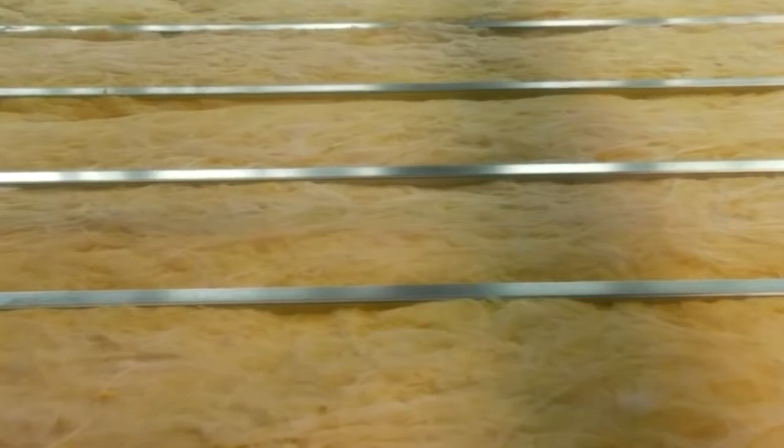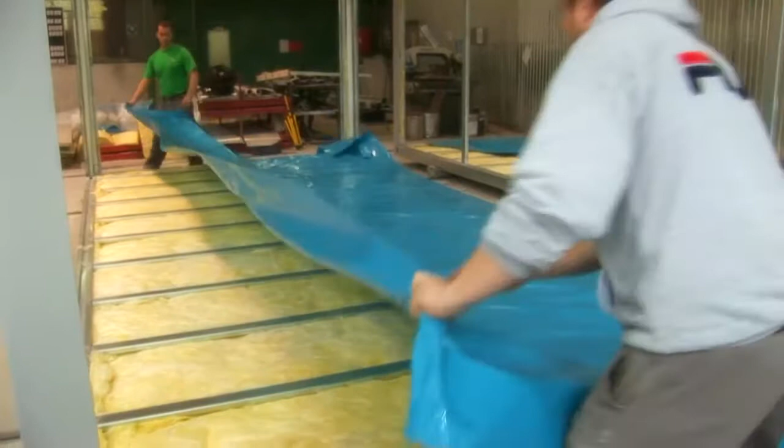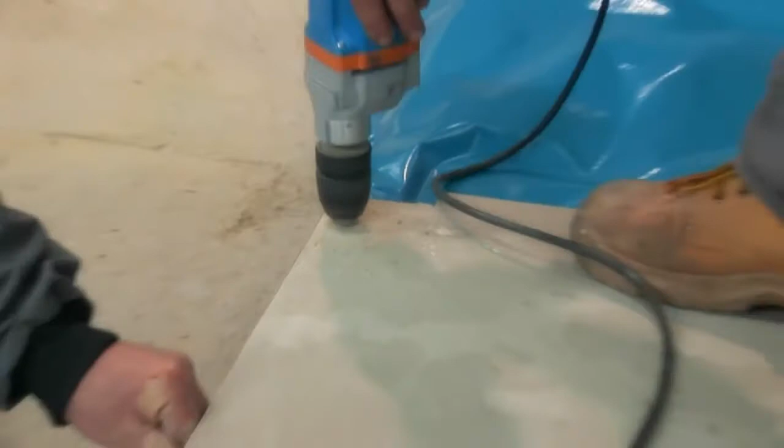CETRIS cement-bonded particle board is used in the system of prefabricated constructions in the form of distributing walkable layers on supports. The supports can be single or bidirectional in the version of wooden beams, pillows, steel beams, and the like. According to demand, the thermal and acoustic insulation is inserted between the beams based on specific requirements and is covered with a vapor barrier.

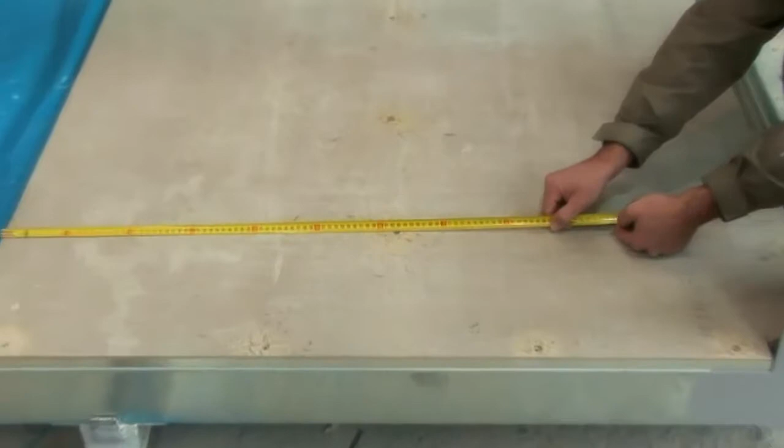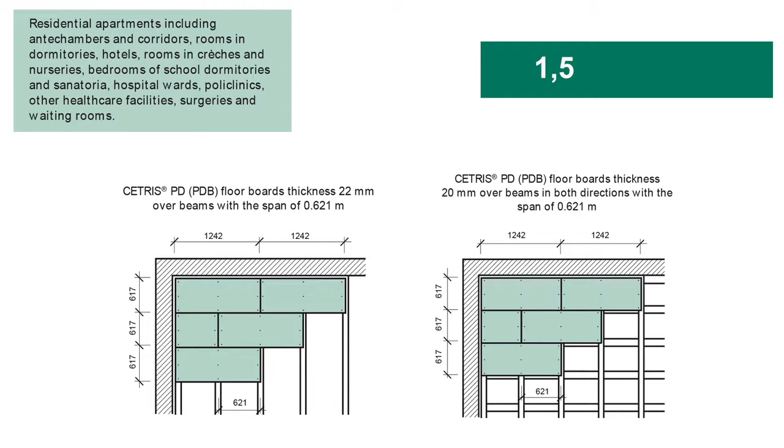CETRIS cement-bonded particle boards are laid close together. When using floor panels with tongue and groove, the joint is filled with dispersed glue in order to keep the interaction of the boards. The thickness of the CETRIS board depends on the support distance and size of the payload. In the technical details, dimensioning tables are elaborated, including the proposal of individual floor compositions for particular types of rooms.

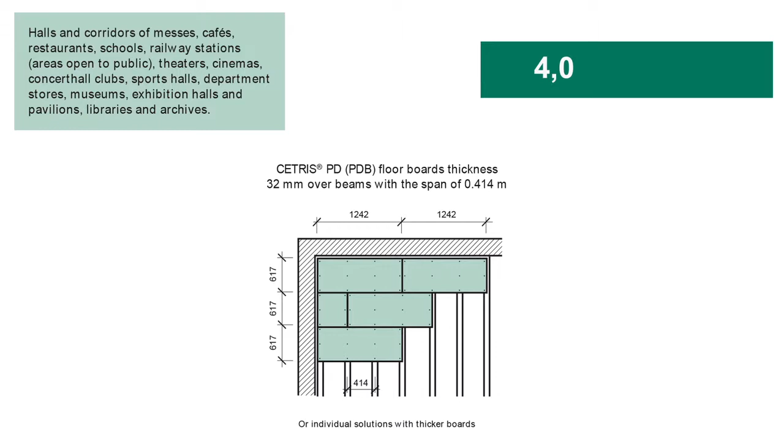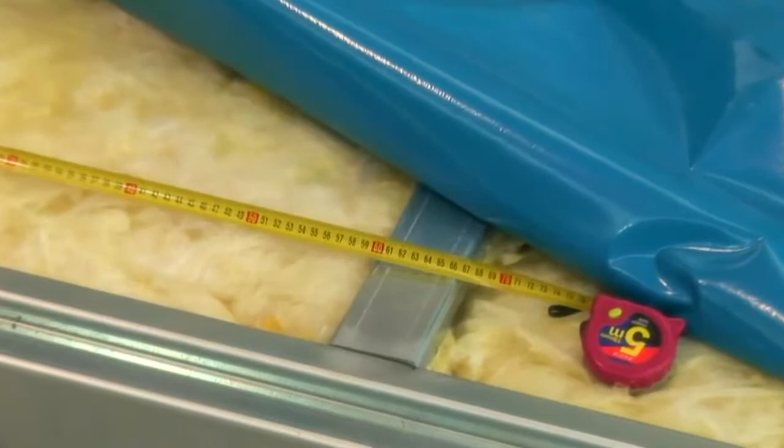After settling, CETRIS boards are screwed to the beams. Screws with countersunk heads are used for mounting. We recommend pre-drilling CETRIS boards for easier tightening. The screws must be placed a minimum of 25 mm from the edge of the board. The maximum distance in the direction of the beam is 300 mm.

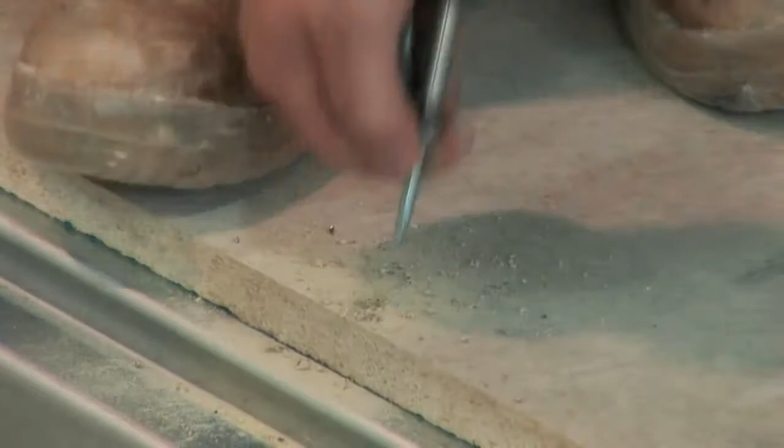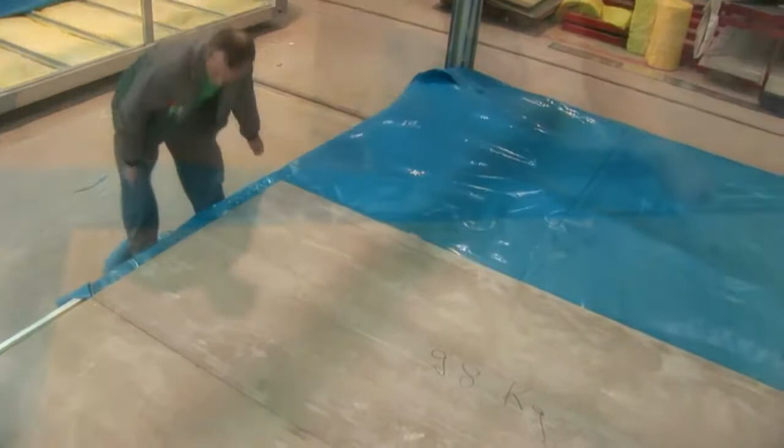When laying CETRIS boards, do not create cross joints. The contact joints must be supported in at least one direction. The minimum size of the cut board is 250 mm. Around the vertical construction, the walls and the columns, the dilatation joint must be a minimum of 15 mm in width.

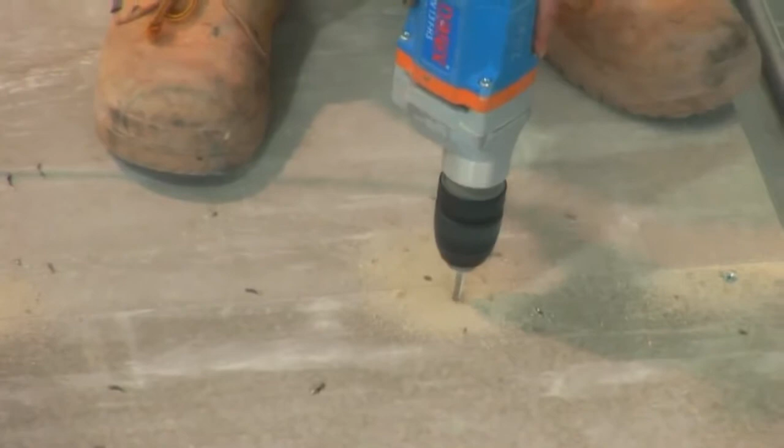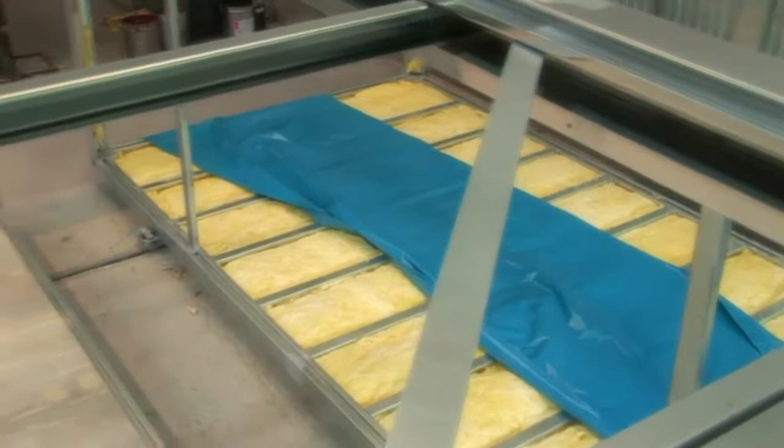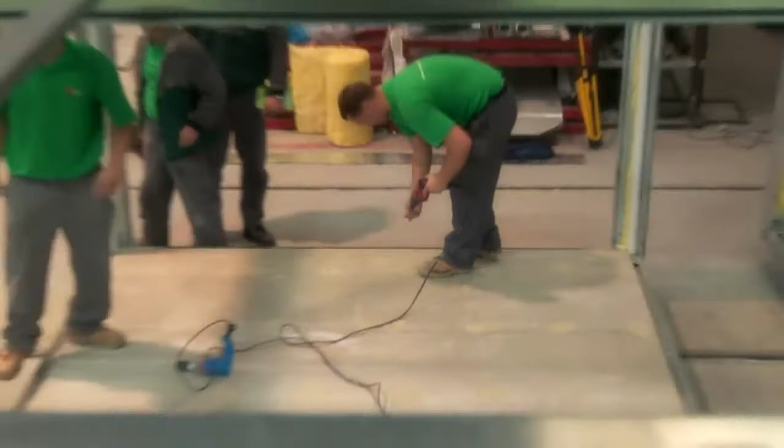After the installation of the floor from CETRIS cement-bonded particle boards, the surface must be prepared before installing the floor covering. The advantage of assembled floors from CETRIS boards is the possibility of immediate load and laying of the floor coverings. There are no requirements for technological breaks. The surface should be cleaned and checked to ensure that the CETRIS boards are properly screwed to the beams.

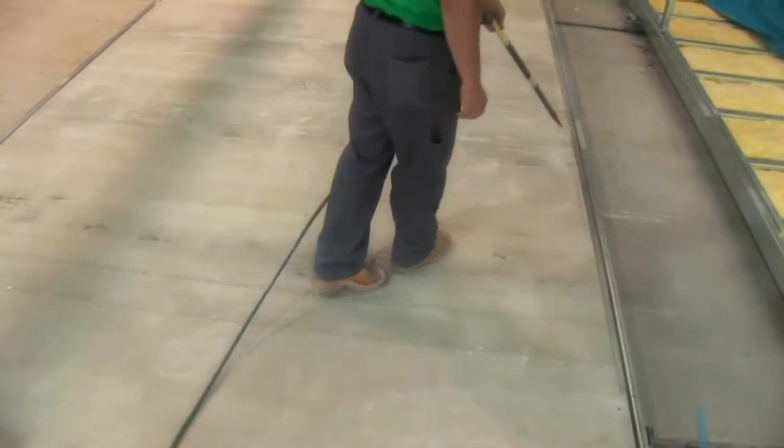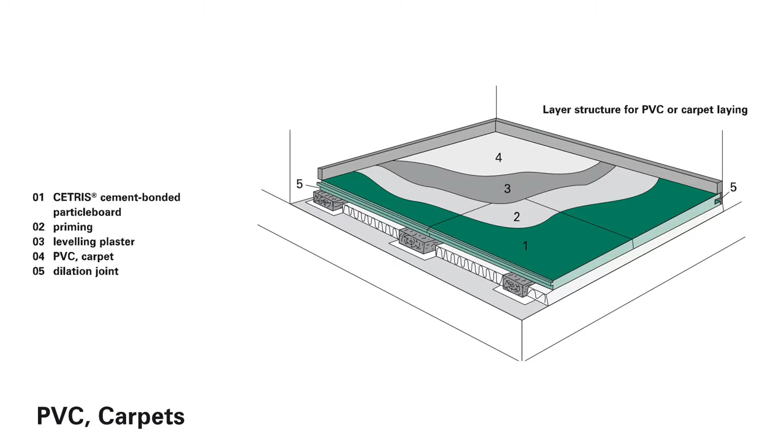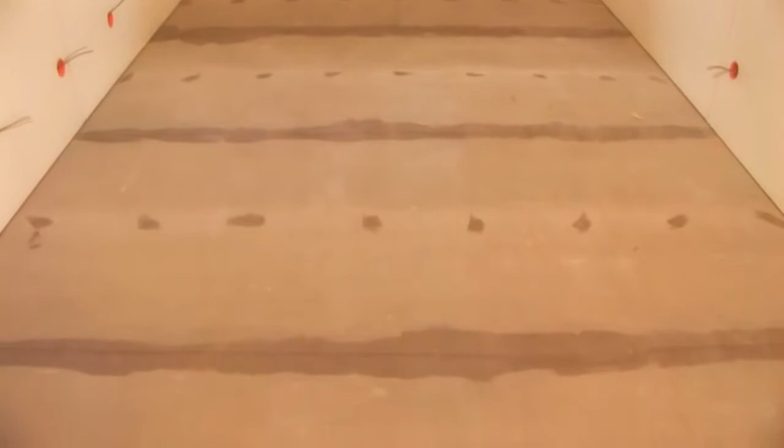The manufacturer of CETRIS cement-bonded particle boards offers solutions for floor constructions with the standard products: CETRIS floorboards in the basic form, not sanded, or sanded. These small format panels with dimensions of up to 1250 by 625 mm are provided with tongue and groove all around the boards for their mutual interconnection.

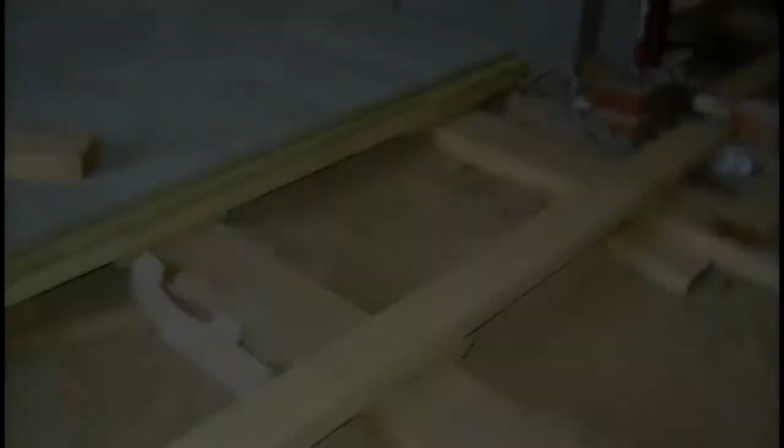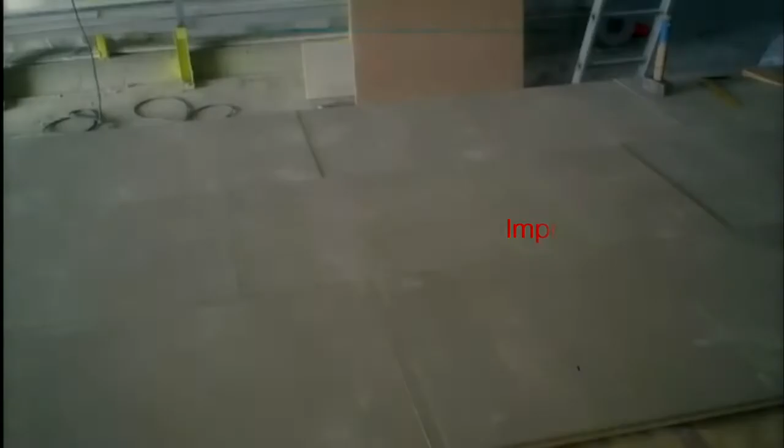Improper insertion of the mineral wool to the beam: if the insulation is compressed, the floor will decline overall. It's correct to use anti-noise insulating pads to a thickness of up to 5 mm. Laying two boards with the contact outside of the support: in the case of floorboards, there must always be two sides on the beam.